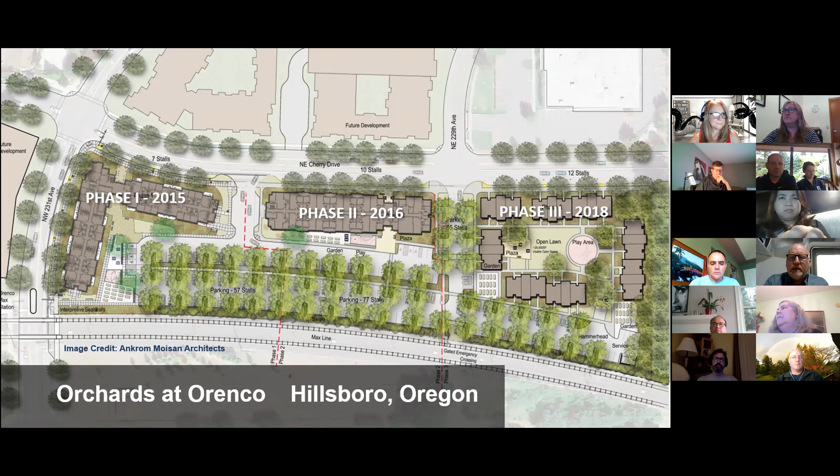So we worked with them to program this project, and Ankrom Moisan was a great design partner on the project with the team. William Wilson Architects was involved early in the project as well. It was a fantastic team working towards Reach's goals.

One of their goals was certainly to deliver the affordable housing, but even more important, in their view, they wanted to do a large-scale project. It was written into their 5-year plan in 2010, and by 2015, they wanted to deliver a passive house certified project of large scale in the affordable housing community.

Dee Walsh, who was the executive director, had toured in Europe and had been fascinated by what she had seen there with several other nonprofit developers from the US, and came back lit up by that vision. And they put it in a plan at Reach.

We started in 2012, and by summer 2015, we had delivered the first project for operation. That was 57 units of affordable workforce housing. The building was about 58,000 square feet.

We achieved PHIUS Plus certification, in this case under the German PHI passive house standard, and the measured EUI of the building, for those who are kind of geeky on EUI, is 21, which actually is a couple points below what the predicted EUI was. So great results at that building.

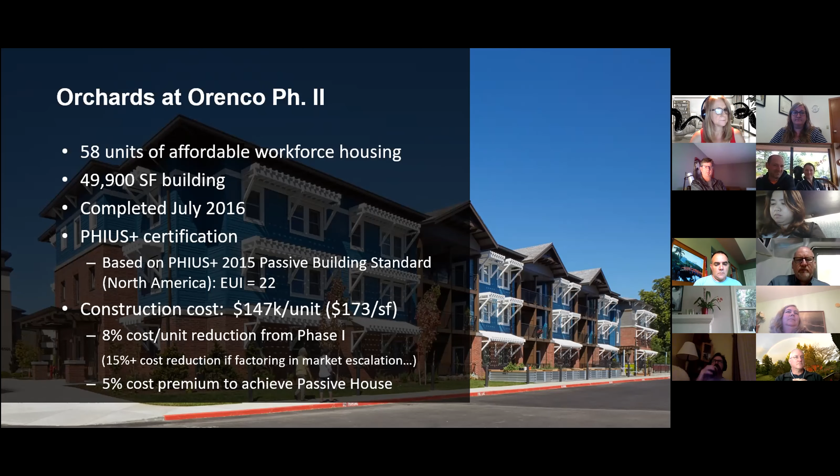But overall, between the two phases, it was an 8% cost reduction, and when you factor in the escalation in the market that was happening there, it was actually over a 15% cost reduction to deliver phase 2 from phase 1. And notably, we reduced the premium to achieve passive house to just 5%, which had a lot to do with optimization of our design and the things we learned on phase 1 that we were able to fine tune for phase 2.

Phase 3 is a little bit different in that the first 2 phases were workforce housing, and the 3rd phase was family housing. Each phase, again, all of them were designed by Ankrom Moisan. They all had a little bit different look and expression and form, but there's many elements that tie the projects together as well. This project is a little smaller in unit count, 52, but they're larger units—quite a few 2 bedrooms, a few 3 bedrooms, and only a few 1s.

And a 62,000 square foot building. Again, a little bit larger building because of the larger units.

We finished this, and actually there was a year gap between phase 2 and when we started phase 3. That had to do with the funding cycles at the state, the tax credit allocations, and phase 3 wasn't successful in its first application, so it sat in the drawer for a year. And while it was sitting in the drawer, all of our goals and Reach's goals were still intact, which included pursuing passive house on phase 3.

We certainly studied it with the design team extensively, but when the project did start moving forward, it was decided not to pursue it. The measures were going to cost too much in the market at that time to be able to finance the project.

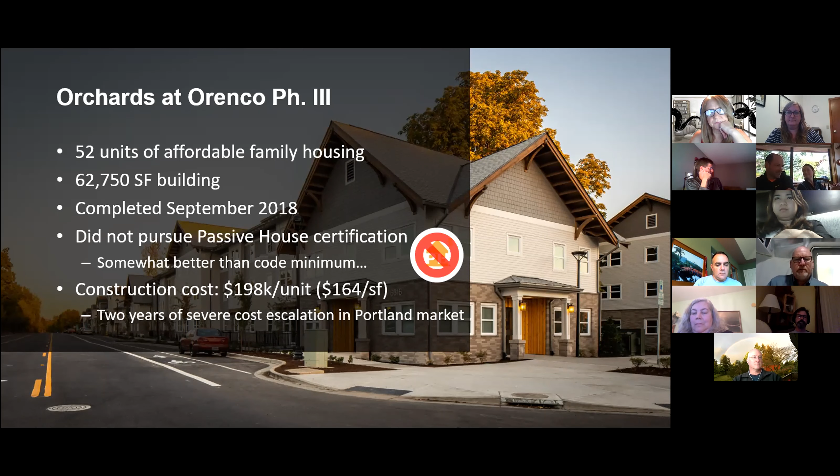But notably, the project suffered a lot of cost escalation in those two years between when we started phase 2 and phase 3. So it was sad times for us because we'd accomplished a lot with the first two phases of the project, and we weren't able to achieve that sort of gold standard result on phase 3.

And again, we're all passionate about this - the folks at Reach, folks at Ankrom, folks at Walsh, our team. We wanted to do it, and it really pained me that we didn't get it done on phase 3. So that's just kind of a parable, I think, about what we face in the industry right now when we're thinking about providing more housing that's needed.

We've got an affordable housing crisis. I like to say we need more housing, and it needs to be better housing. It needs to be really well built, well designed. It needs to be durable, and it needs to be super efficient, energy efficient, to deal with these environmental impacts that we're experiencing and that we need to mitigate much better than we are currently.

But while we're facing those challenges and trying to meet those goals, we face this challenge, which is construction cost escalation. This is a chart put together by a fellow named Ed Zarenski. Basically he's tracking construction costs over the last 15 years, and you see a big steady rise in costs. This is tracking the cost indices put together by different reporting systems in the industry, some companies, and then such places as RSMeans.

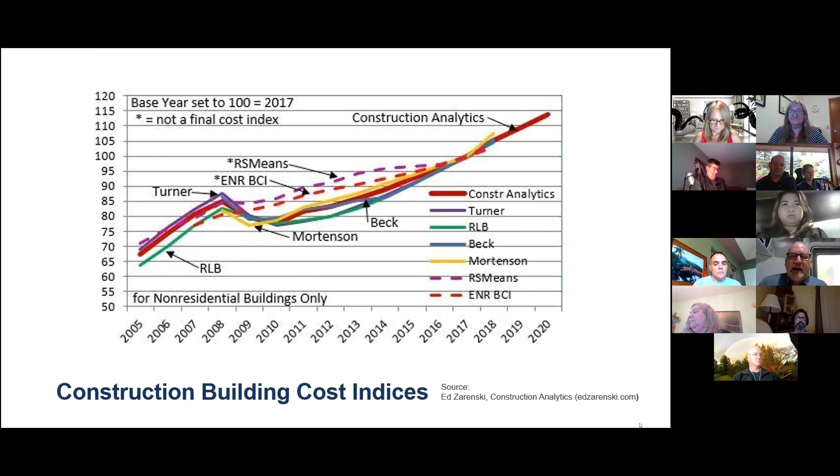Normally the inflation rate or escalation rate for construction is in the 3 to 4% range, and what this chart is showing is that it's more in the 6 to 7% range during that period from 2014 to the present, really. But it was significantly higher than that in our region and in the multifamily market.

So a huge challenge for us while we're trying to achieve these goals. We've gotten our heads around this issue of construction costs, and there's a lot of costs that go into putting affordable housing together.

Why so much focus on construction costs? Well, this chart shows why, because it's by far the biggest piece of the pie. It's where we can move the meter the most if we can figure out ways to reduce cost.

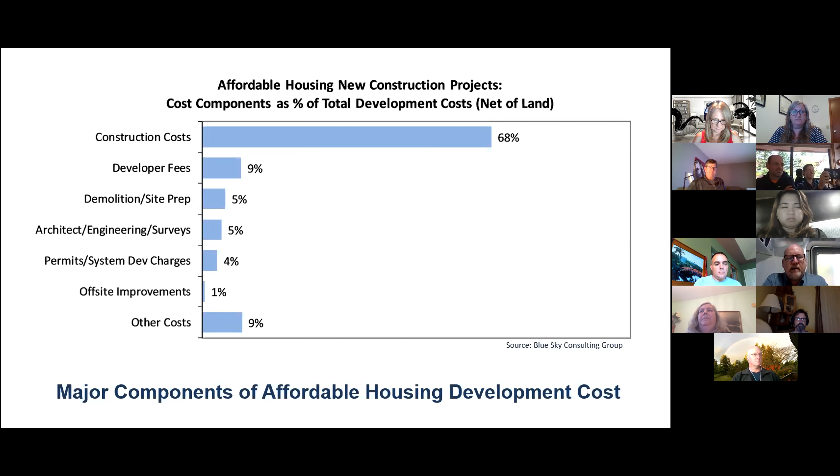So that's what we're focused on for this talk, but there's a whole slew of other issues that relate to the cost of affordable housing that are in those other line items down below, and they need to be addressed in some ways as well.

When we think of what is construction cost, it's essentially the divisions of the work all added up. So that's some big ones like in affordable housing, the wood structure tends to be a very large piece. Finishes are a large piece, the mechanical, electrical.

We have a general category at the start there for site supervision and such. We have what we call the other category that might cover the safety plans for the project, the hoisting and access for the work, miscellaneous other items.

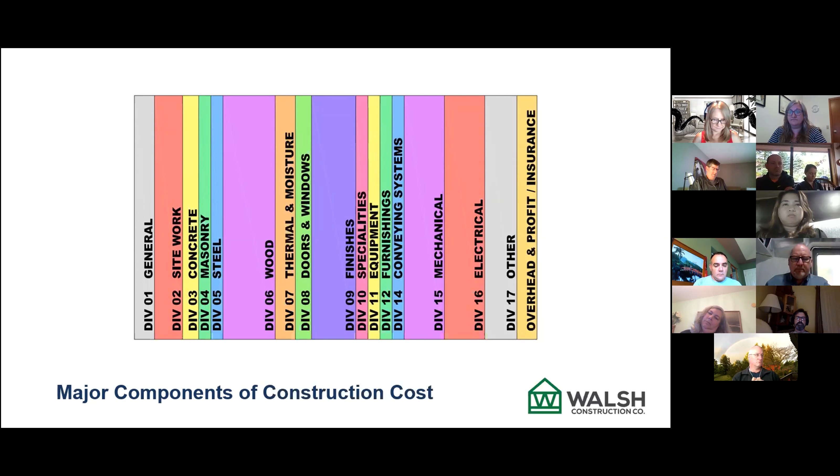And then at the end, a little bit of something for the trouble of the general contractor, overhead and profit, and insurance, a small amount typically. And when we add all of that up, that is what is essentially construction cost, or what we also refer to as the hard cost of the project.

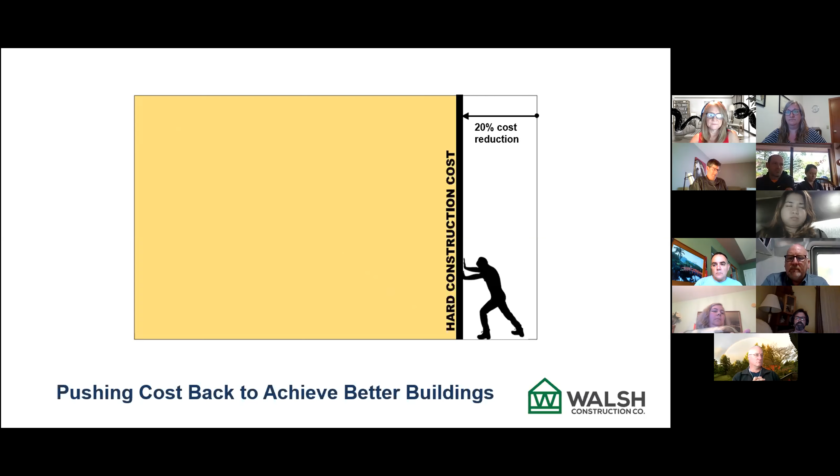So we step back and say, what if, to address this housing affordability issue, to address the numbers issue, how are we going to deliver more housing, especially with a limited amount of resources to do it? How could we work as teams in the industry to push costs back, given this wave of cost we've been facing for the last almost 10 years now?

And we conceived this idea of just conceptually, what could we do as teams to push costs back 20%? I know we would have to do a lot to do that, but let's start thinking about that and talking about that, how we can do that as teams.

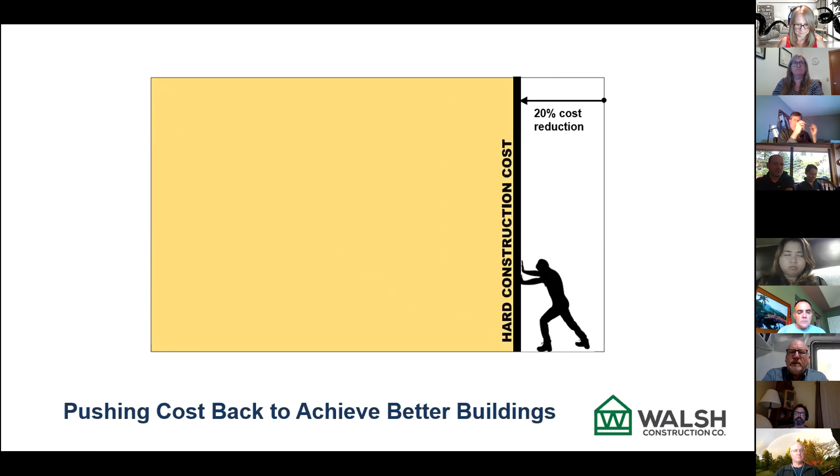And if we could do that, what could we do with those savings that we could make.

And in the niche that we work in affordable housing, where a lot of Walsh's work is, we work with mission-driven clients and owners, they're not about building and flipping properties. They build and hold for the long term.

They have other missions to what they do with their buildings, take care of people, support the community. And part of that is a better living environment and a more efficient environment that costs less to operate, not just for themselves, but for the people who live in the homes that they create.

So our clients are very interested in performance and always have been for the last 20, 25 years that the green building movement has moved forward. They've been very proactive and emphatic about embracing that. So we know that's important to our clients.

We also know that - maybe you don't unmute, but raise your hand if there's any architects in the room. I believe there probably are some. I'm an architect. Yay! I'm an architect as well.

So what I want to stress is that we want to account for differentiation and amenities and such, and I just use the term joy for that. You can lump beauty in there, whatever you would like, but we're not talking about creating barracks and minimum existence dwellings and really crummy buildings.

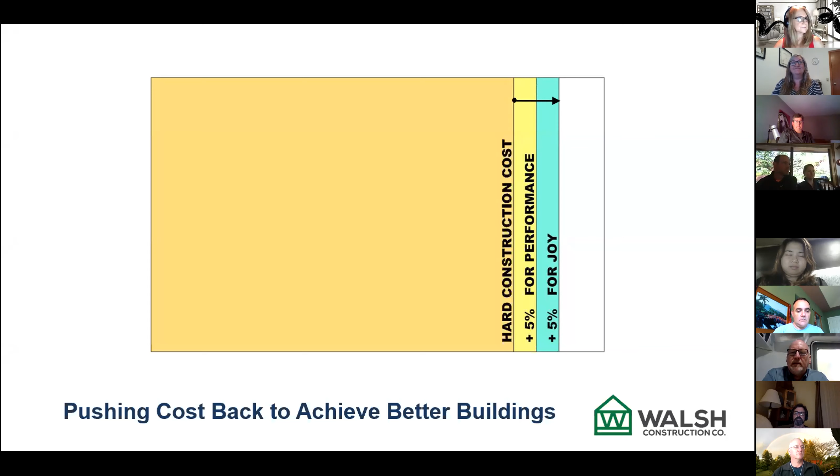We're talking about really great buildings, what I call better buildings. And so the idea there is if we can find ways to work diligently to reduce cost that much, then we can create room to have these performance features and amenities in our buildings and still reduce cost.

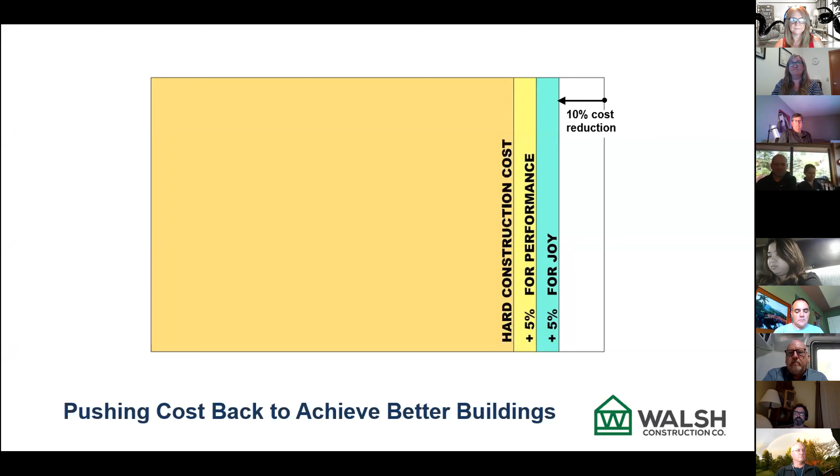And our idea is shoot for 10% cost reduction, but really better buildings coming out of that from what we're seeing today.

And I'm sure many of you are there where we have been, where we've just seen a lot of projects get reduced in quality, just desperately hacked at during value engineering processes late in the game because of runaway cost escalation. And we're trying to create a more emphatic way to address that and turn that on its head and be able to build quality back into the projects through our process.

So how might we do that? We look at it a couple different ways. One is...

By applying a set of principles of cost-efficient design to the overall design of the buildings, and in many cases to the subsystems that go into the building, focusing on using more standardization, more repetition, more prefabrication to the extent it's valuable in projects, and also looking to use the economy of scale whenever possible.

So that is really typically site dependent, but again, it comes into play when you can find larger sites as a developer and as design and construction teams. You've got more potential to reduce costs and be more cost efficient.

I'll talk about those in more detail in a minute. The other thing is just the idea of opening up the lean construction toolkit and not doing everything in there, not taking all of the tools out and using them all at once, but selectively using some of those tools to make a better process.

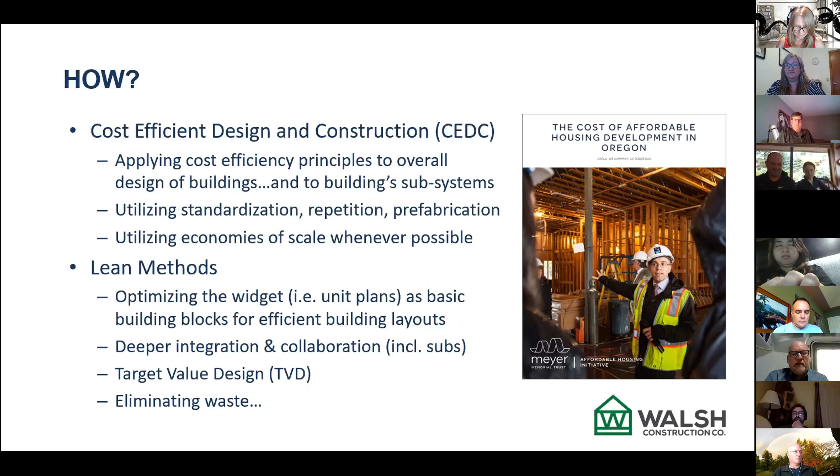And then just the last idea is eliminating waste wherever you find it in the project stream, during design, during construction, always looking for ways to reduce and possibly eliminate waste.

So with cost-efficient design and construction, basically Walsh has been building affordable housing in the Pacific Northwest for over 50 years. And we basically said this cost issue is so critical now to the clients, we're just going to lay out all of our ideas as clearly as we can, as simply as we can. And we kind of created a white paper with these ideas.

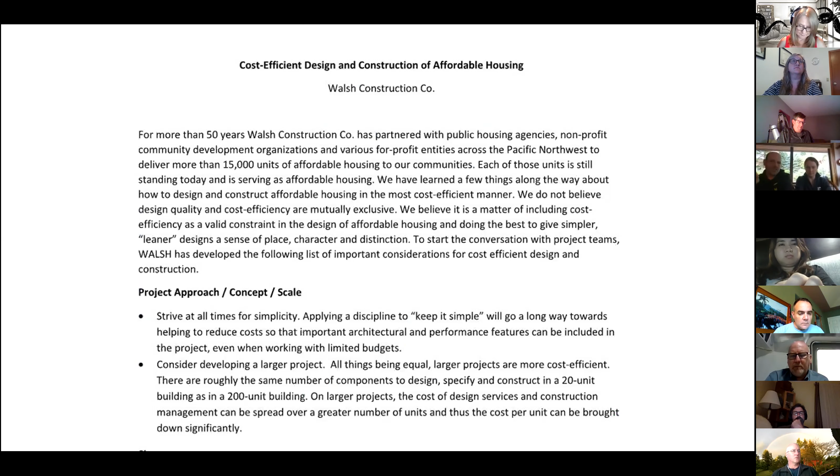And anybody listening who's interested in that, I can provide it to you if you reach out to me at the end of the talk or after the talk. The last slide in the talk has my email address, and we welcome people reaching out for this information.

I'm not going to get into the specifics of the principles here because we're time limited, but I essentially call it—I grew up in the Midwest—I call it farmer's common sense. It's all pretty straightforward stuff. It's stuff that you basically know.

Almost I feel like I need to apologize for writing it down for the industry and for certain members of the development, design, and construction community, because many of these principles aren't followed on many affordable housing projects and their designs. So none of this will actually be earth-shaking to any of you, but it was the exercise of putting it together that was more about just taking stock of it all and making it as clear as possible as we could.

These first three items are really issues of project conception, and they're less in the design sphere and the construction sphere than they are in the developer sphere, in terms of site selection and just how they assemble teams and conceive of their project and lead their projects.

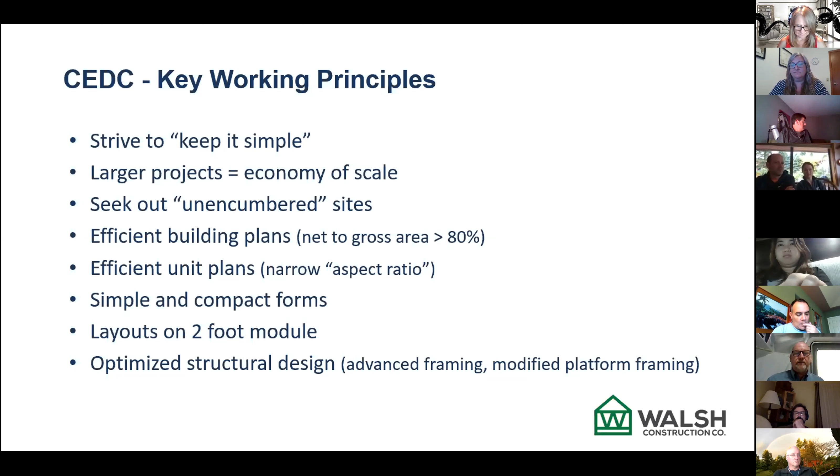You can get apartments too narrow, and then they're not functional or livable anymore. A classic example is what's called in Seattle the urban one bedroom—we don't see them as much in Portland, but they're everywhere in Seattle. That's basically a one bedroom with the bedroom internal, either at the corridor wall or mid-position within the apartment, borrowing a little light from the living area, kitchen and dining area. But it's not really good design practice in terms of aspect and livability, having daylight and ventilation into a bedroom. In fact, in the affordable industry, that's not allowed—Oregon Housing and Community Services won't fund a project that doesn't have a window in the bedroom.

Continuing on, another set of principles in the CEDC canon—again, the white paper outlines them in detail. Some of these you can live with if you're architects out there; some might be a little harder, bitter pills to swallow. But these are frankly what was done 20, 30 years ago, and prior to that in historical traditional construction, and in the cost-effective, affordable construction of the 60s, 70s, and 80s, that we largely moved away from in the last 20 years or so.

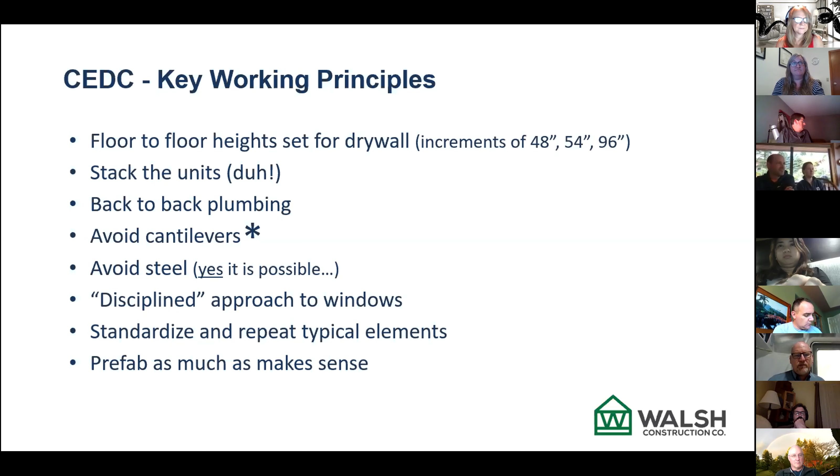But we also recognize—we're not proposing that developers and architects working with them are going to design cookie-cutter buildings, the same building for different sites all over the place. We understand every site is unique. The program that goes with every site is typically quite unique, and that in itself will require customization, along with any number of things that have to do with the site, its configuration, how the corner bound lines come together, what the zoning envelope and overlay are, and what the neighboring buildings look like. All of those are factors we all know about.

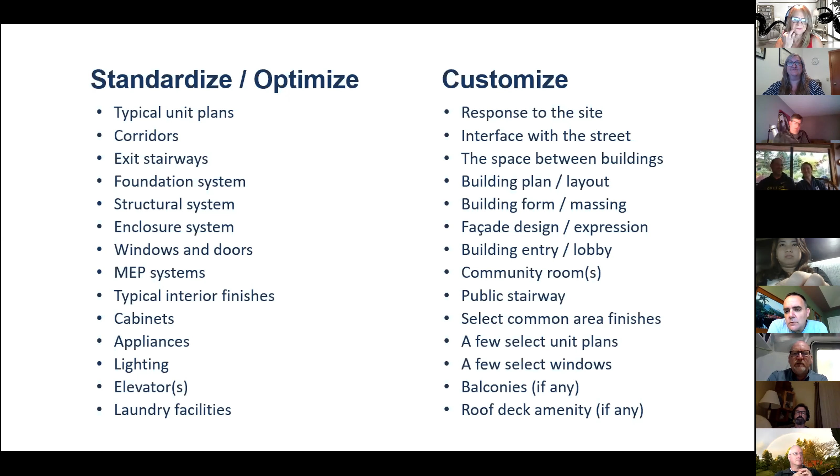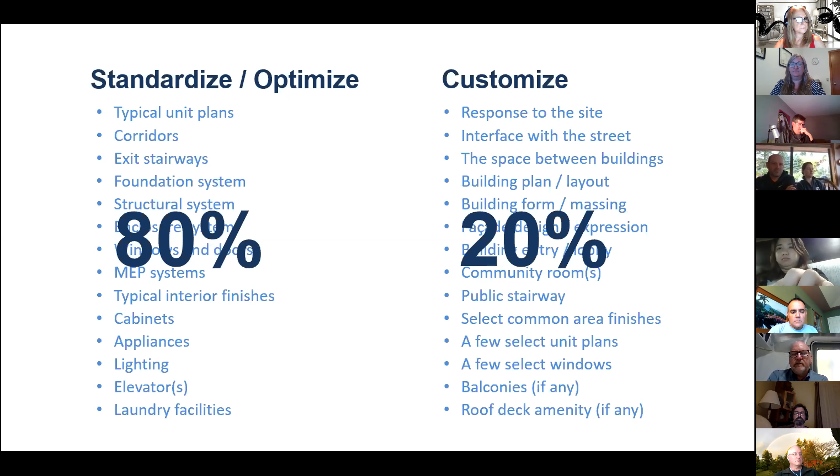So our idea is to really focus on the things we can standardize—roughly 80% of the building, or could be even more. If we focus on that, we're going to drive costs down in all of those standardized, repetitive elements, and that in turn, if followed with a lot of discipline, will create a lot of room in a given budget to really focus design attention and materiality on the items on the right that can actually make the place unique and special.

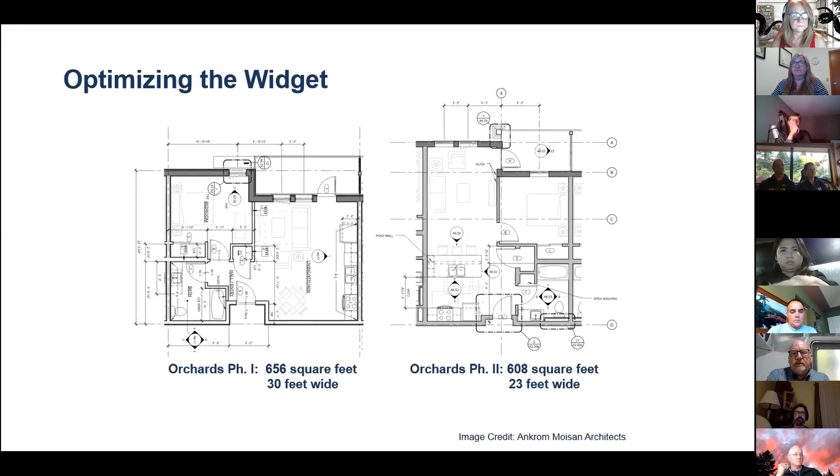What happens with that change? Well, a couple things. That simple singular change changes some quantities significantly. The amount of skin you have to build per unit is reduced 20% by changing that width of that unit.

If we aggregate the savings across the projects, this is a diagram of the phase 1 plan with those mostly 1-bedroom unit plans. Same thing happened at the 2-bedroom units. You can see how wide those 2-bedroom units are.

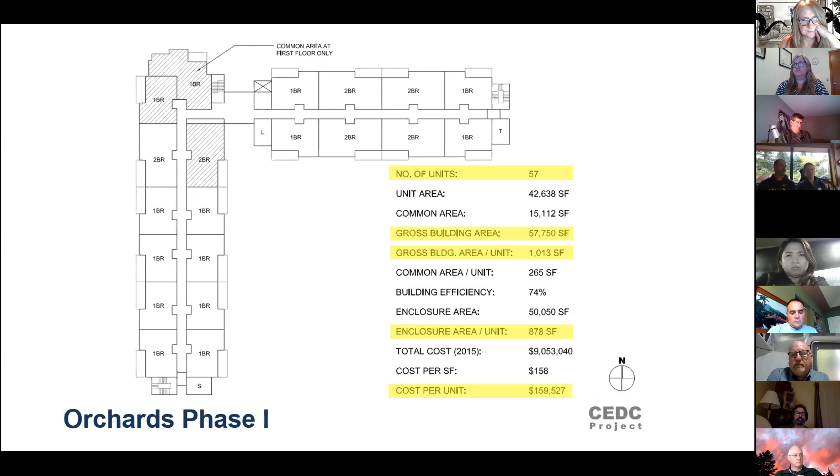We had 57 units in phase 1, and I mentioned before, 58,000 square feet. That's a little over 1,000 square feet per unit, almost 900 square feet per unit for skin, and it was $160,000 a unit.

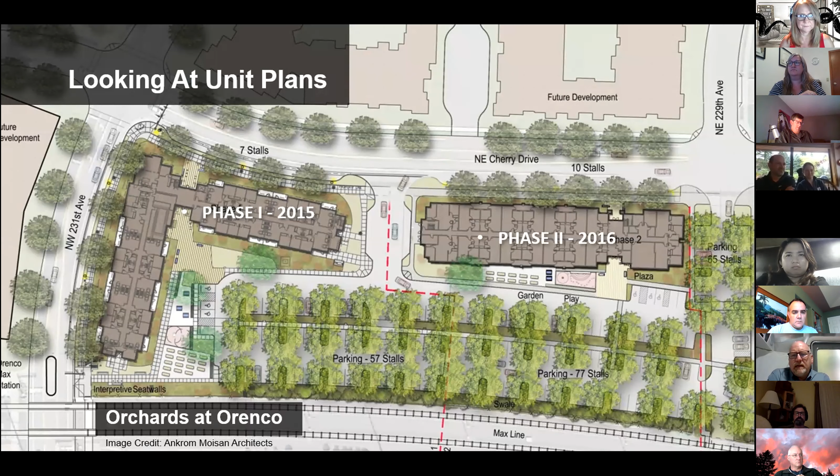Now the diagram for phase 2 - interestingly enough, let's go back here a little bit. Those buildings are both 3 stories tall, and they both have the very same number of units. Actually, phase 2 has 1 additional unit, and again the unit mix is essentially the same. So you see a building form on phase 2 that's much more efficient.

Here's where it shows up in the numbers. We have 58 units. The amount of building area on a per unit basis is reduced from over 1,000 to 860. The skin is from nearly 900 square feet per unit down to less than 700. And the cost per unit went down to 147,000.

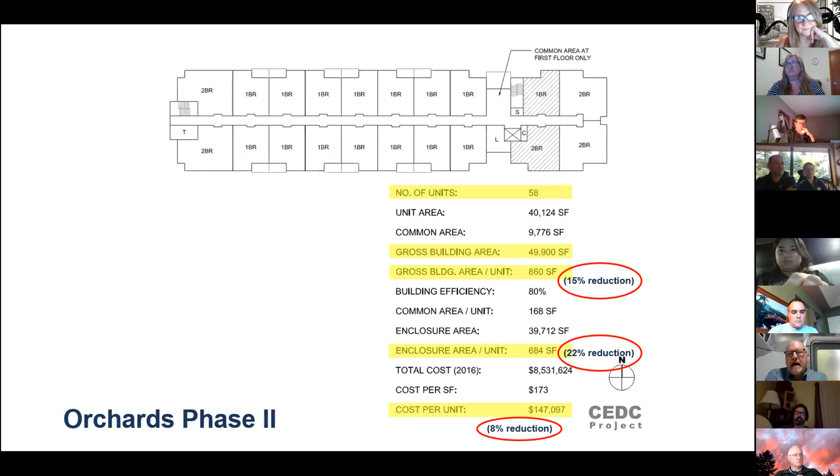That was the 8% reduction, and if you figure the escalation, it was more than a 15% reduction between the two. A lot of it was just the raw efficiency of the building layout, starting with the unit plan.

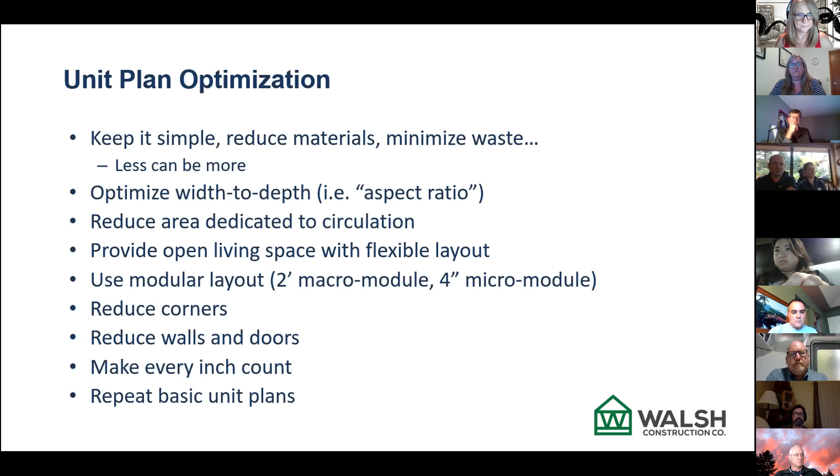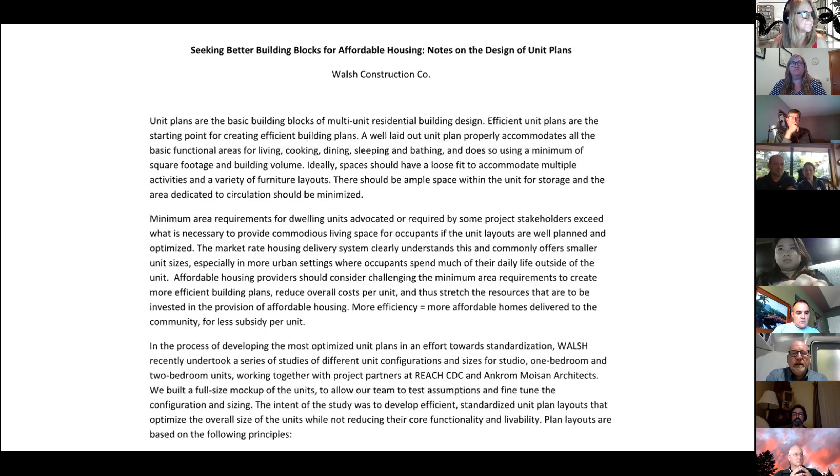I don't have time to go into the details of unit plan optimization, but we've thought a lot about this as well - what we've seen, what we think works, things that are problematic - and we've laid down a set of principles for thinking about unit layout and planning, and put that into a white paper as well. Again, if people are interested, we can share that with you after the talk if you reach out to us.

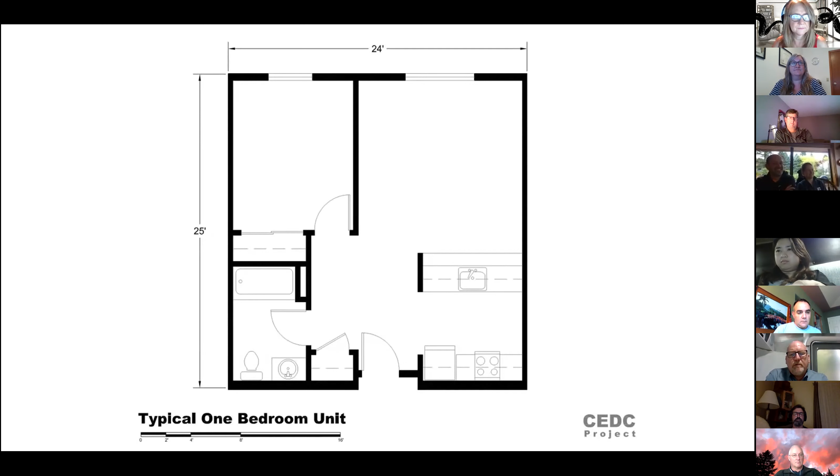Over 50 years, a lot of 1-bedrooms look like that, 600 square feet. When we're talking about optimizing, we're talking about this notion of simplifying but not impacting livability, and by just being smarter about things. I'll get into those in just a minute.

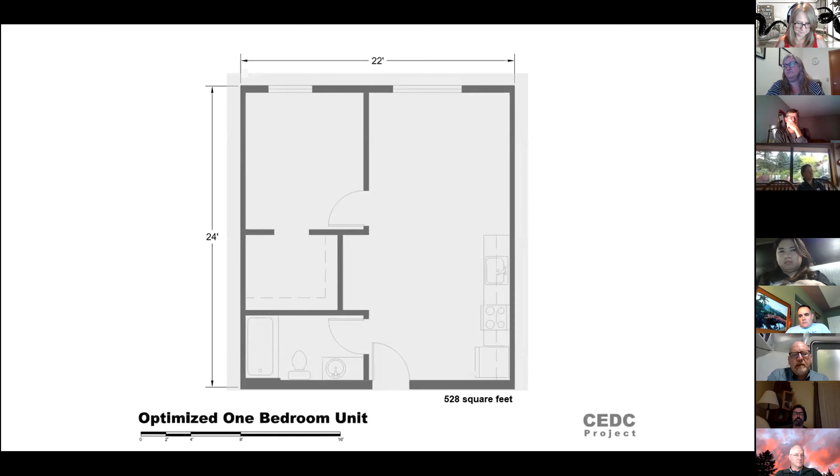What we've done here is we've reduced the size of the 1-bedroom from 600 square feet to 528 square feet. It's not a huge reduction, but it's a selective reduction that we believe still keeps the livability and functionality of the unit intact, and does a whole bunch of other things.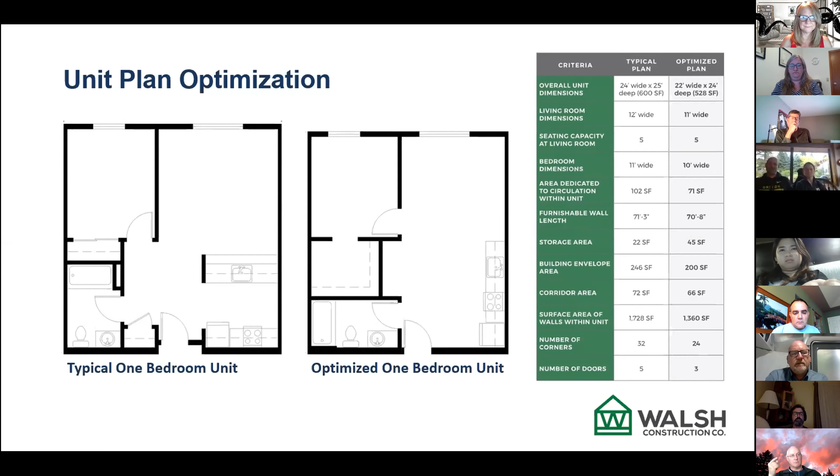There's a whole thought process that goes into what we're thinking about with units, and even some suggested unit plans that we've developed that people could look at if they're interested.

So we have a client. I've talked to a lot of our different clients in the nonprofit world about these ideas, and I had a client who called one day driving probably fast down the highway. He's based in California in the Bay Area. They do a lot of work in the Northwest, and he's like, we got some land, Mike. We got some land, we want to do some homes, and we want to do that thing you're talking about, that radical simplicity thing.

So I'm going to talk about case studies. I don't know, how are we doing on time? We okay on time? We're okay on time.

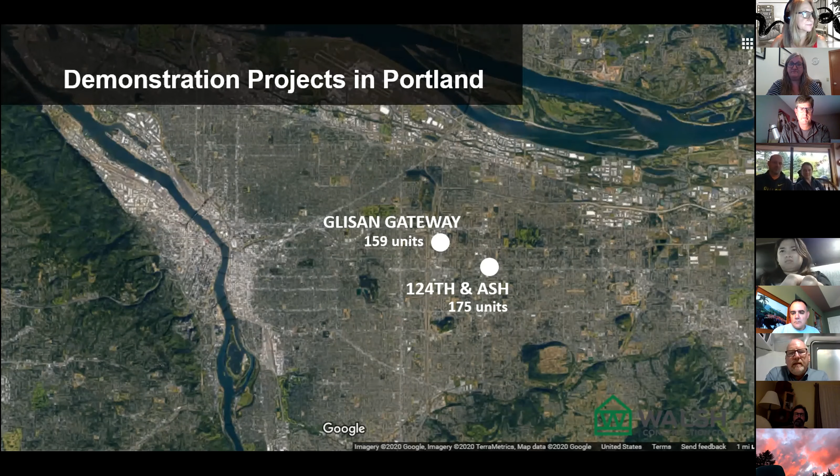We're actually working on quite a few projects applying these ideas now. The two most developed are well into construction and will be done later this year, both on the east side of Portland. One is 124th and Ash, which is 175 units of workforce housing with Reach Community Development, and Glisan Gateway is 159 units, again workforce housing, really close to the Gateway town center and transit center. They're right off of 405.

These projects — I showed this image a little earlier, didn't speak to it when I showed it — but when we were developing these ideas, something was going on in the background, which was the Meyer Memorial Trust, a charitable organization based here in Portland, serving Oregon. They have multiple focuses for their charitable giving, but one of them is affordable housing. They've been interested for many years in the issue of the cost of affordable housing, and why it seems to be escalating so much, and why it seems to be so much more than the cost of housing delivered in the market, in the non-affordable market. They convened a work group starting in, I think, 2015 or 16, to study that issue and advise them on it, because they put a lot of money into this, and they want a good return on the money they're putting into it.

So they had good questions about why does it take so much to do this. Of course, those involved in the industry know there are a lot of rules, regulations, and inefficiencies in the system, and those were all laid out in, let's just call it nauseating detail, during the course of the work group that Meyer put together. They put a report together — you see it here on the right. If you're interested, you can search that online, it's very interesting — one of the best pieces done in the nation to study the cost of affordable housing.

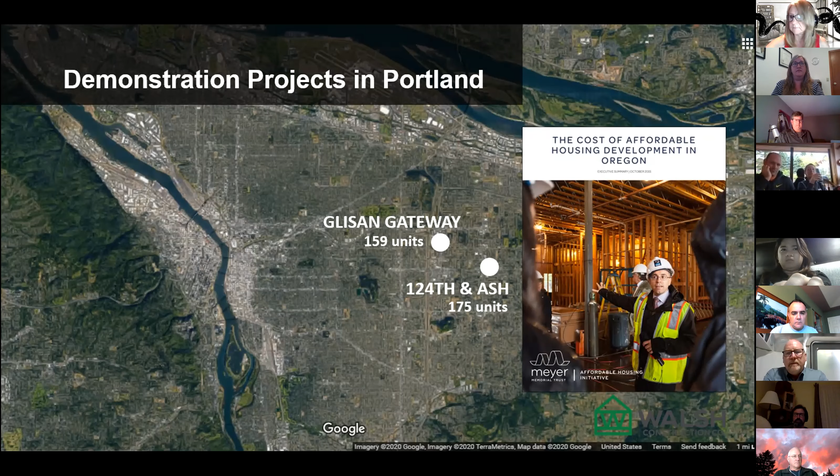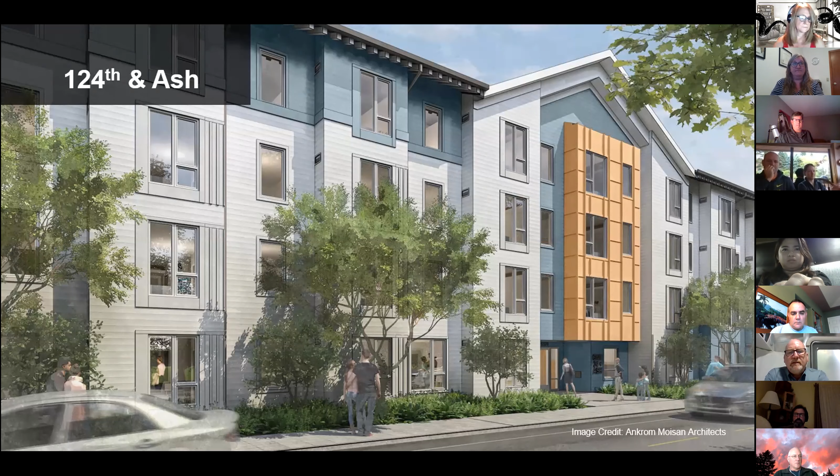124th and Ash was the first project out of the gate pursuing these ideas in depth. This is in East Portland. Reach is the developer, Ankrom Moisan is the architect, and frankly this is the same team that did the Orchards project, with Walsh working on construction.

A number of years ago we accomplished passive houses over three phases in Orenco, and it was basically the same team getting together to pursue Reach's new goal, which was cost efficiency, and pursuing that innovation in production of cost-efficient housing.

This project was awarded a Meyer Memorial Trust grant to help fund that, and it funded a couple things. It funded a little bit more work in the pre-construction process relative to pursuing our target value design process, and we built a mock-up of our optimized widgets, or optimized unit plans - full-size mock-ups of those.

It also went into the procurement of a lean construction coach that Reach brought on board to experiment with lean construction ideas on the project.

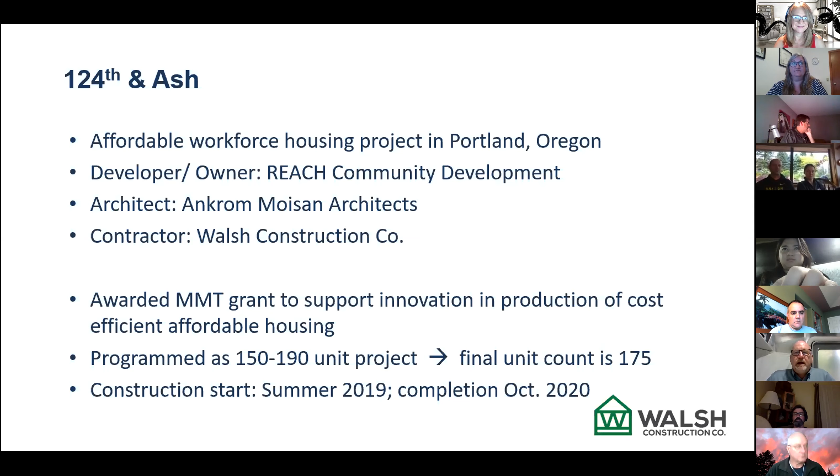We started construction last summer, and should be complete in October. Two months ago we thought we were going to be a month or two ahead of our scheduled delivery because things were going very well. But of course we've been hit by a little surprise along the way, like everybody else has. So we'll see - we still think we're tracking well for on-time delivery for the project.

As I mentioned, Reach wanted to pursue lean ideas here on this project. The first and foremost notion was that they were going to be very clear about what their goals are, and one of them was cost reduction - they put a number on that. They envisioned a big, hairy goal for the project of reducing costs 30% in relation to the total development cost limits that Oregon Housing and Community Services sets.

They basically set cost limits for affordable projects pursuing tax credit allocations, based on a per unit limit cost for a 1-bedroom unit and a 2-bedroom. So you add up the number of units of those various sizes, take that times the cost limit, and that tells you what your total development cost is for the project. They set the goal to be 30% below that.

It's no secret that some projects exceed that and are allowed under a variance rule to exceed that cost for hardship reasons, and it's not unusual for that to happen. So certainly, I don't think anybody's achieved a 30% reduction from those targets before.

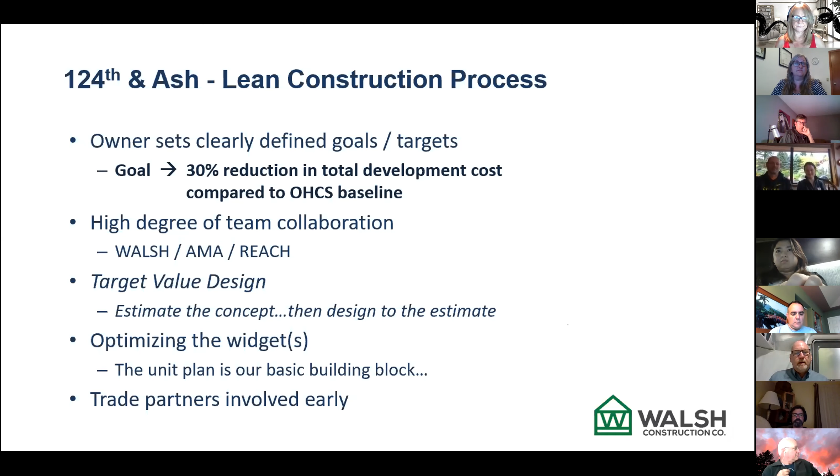Optimizing the widget again, I mentioned we actually built, this was the project where we really explored the optimized unit plans, and we built full-size mock-ups of those in tenant space that Reach had in their headquarters building down in South Waterfront, and we were able to kick the tires of what we were doing with those units. Frankly, Reach even brought their funders in and the stakeholders, the city agency people that fund the projects, the state agency people, so they could see what we were doing as a team. It was a really great way to show people that, yes, we are trying to refine and optimize, but we're also very attentive to making livable, workable homes while we're doing that.

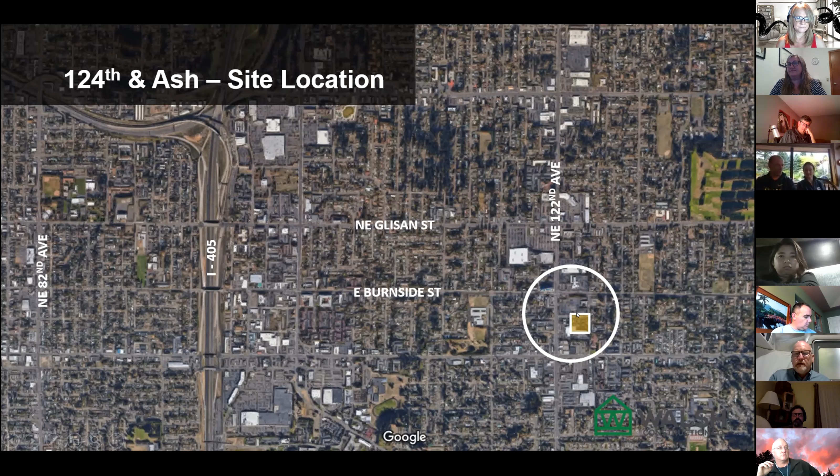I mentioned getting the subs involved early. So this is the site. This is East Portland, out just east of 405, 122nd Avenue and Burnside is a Max stop right there, where the Blackburn building is, as some of you may be familiar with. We just finished that building for Central City Concern as well. And right as we were finishing that, we moved over here to this site and began the ASH project.

And this is what I'll call the very definition of an unencumbered site. We did have our utilities in the street there on Ash Street. We had very little slope on this site. It's roughly 240 feet by 240 feet square, so essentially slightly larger than a Portland downtown city block. There you see a bunch of glorious asphalt paving and some small trees. So this was basically a surplus park and ride for TriMet, right across the street from a really huge park and ride. They had this, I guess you could call it a fallow park and ride that really wasn't even used. It had a chain link fence around it. Reach was successful in securing this through a competitive process with TriMet, and we began work on the project.

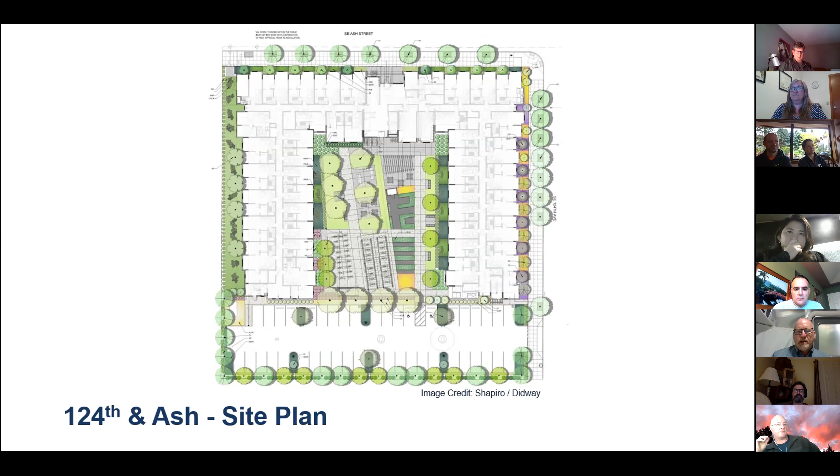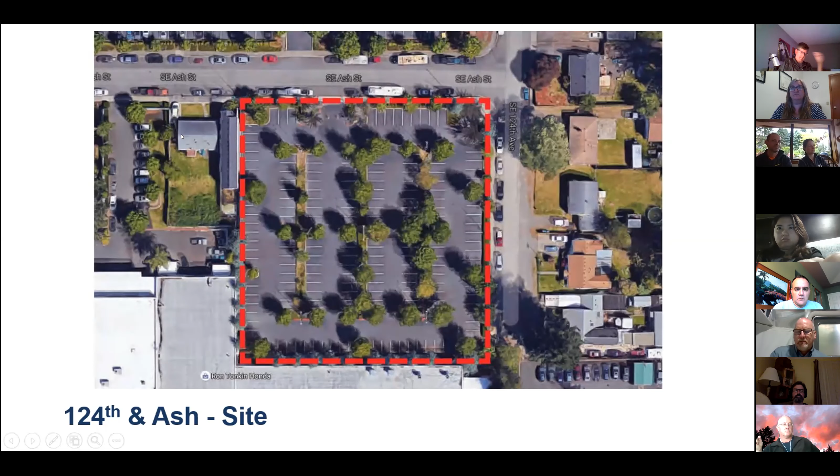There's a large warehouse here for Ron Tonkin car dealership. Most of the, like I said, there was parking here, and then some single-family residential over to the east, and two small single families here on the west. So it made sense to put the surface parking here as a buffer between the courtyard and the building and the warehouse here.

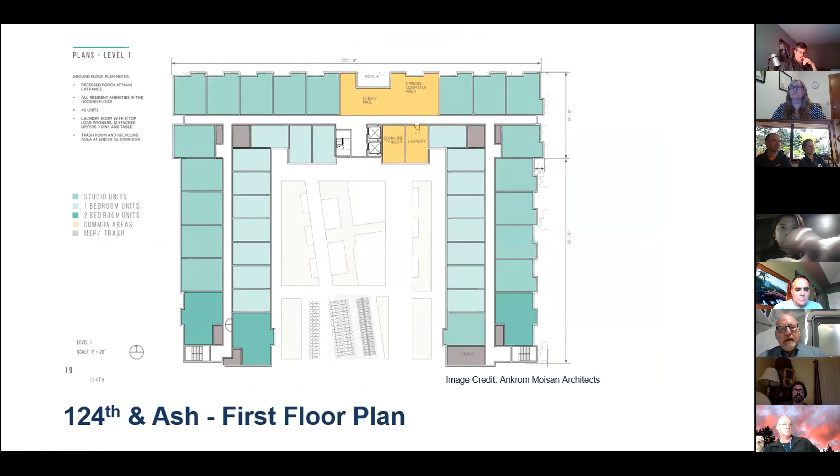Diagrammatically, you can see how the plan works. This is the first floor level. If we look at a typical floor up above, we have the optimized studio units lining the courtyard, wrapping the outside of the U and facing onto the street facades here. On the north and the east are the 1-bedroom units, and then the few, small in number, 2-bedroom units are located at the ends of the corridors.

One thing you notice here is this articulation of the street facades. In general, we tried to pursue a fairly simple massing of the building and form articulation, but here the project wasn't governed by a type 3 review. It was governed by design standards, community design standards out in the neighborhood there. One of those requirements is that no facade element can exceed 500 square feet in a single plane, or you have to have a 2-foot minimum articulation. So it's literally almost a mechanical implementation of the planning standard to apply to these facades facing the street. But again, it's just those same optimized units, just a different implementation of the outer edge of the unit. Everything else inside stays the same.

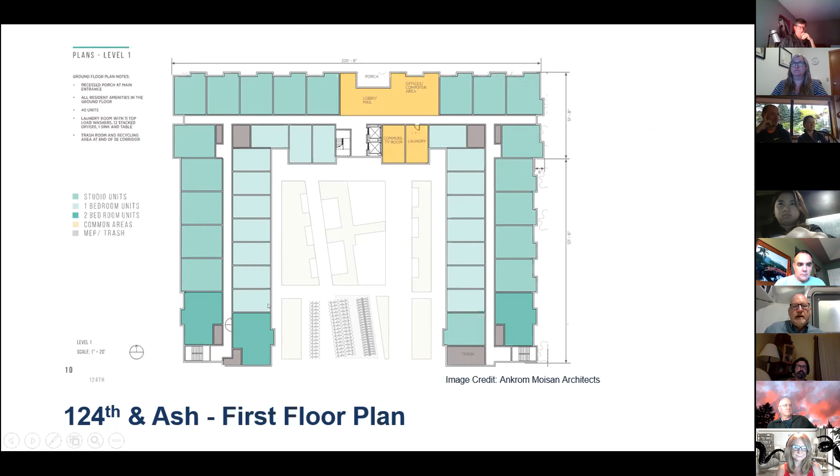At the ground floor, there's a little bit of a few stacks of units that are reserved for common areas, but it's a very efficient building layout for the most part. As you can see, very standardized and straightforward.

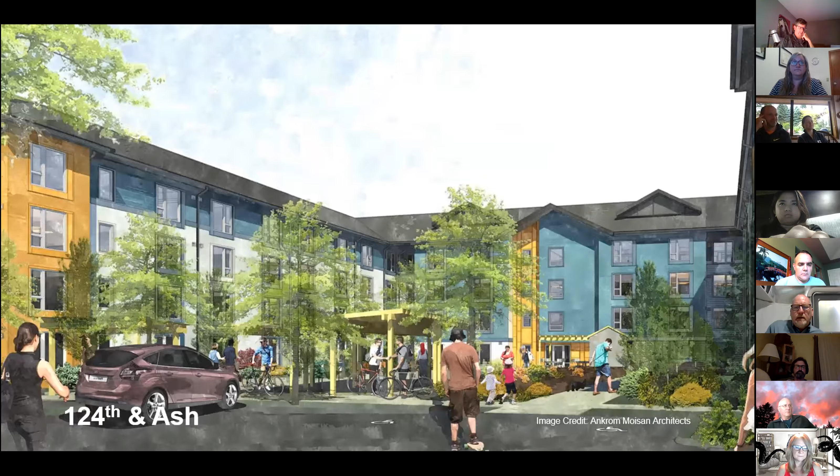Here's a view of the courtyard from the parking area, and a finished view where you see the step outs. These are the 2-foot bays that articulate that facade per the community design standards. The cladding on the project, in keeping with the, let's call it Spartan budget that Reach put forward here, is fiber cement. What we did as a team working together with Ankrom really worked through this idea called superlap, which occurs in about 5 or 6 different areas, little figurative elements around the building that are brought out and emphasized at entry points and touch areas.

And that's essentially fiber cement as well, but it was developed by Ankrom with what they called superlap. It's basically a panel that's detailed to look like a big lap, or a shingle. It looks like a shingle almost.

So it was one way of taking inexpensive materials and trying to do something different. You can also see here where they've done something similar with simple fiber cement materials, great patterning on the facade. So those were attempts to stick with the budget and still do that.

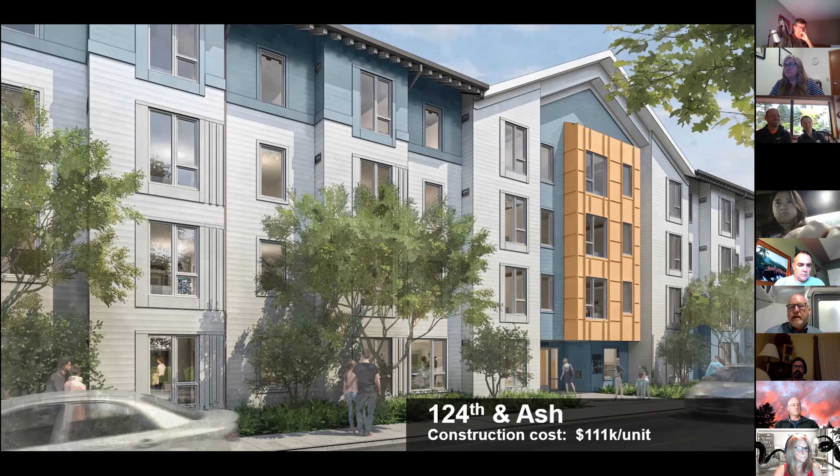What's really cool about the project is when we did all of that work as a team—this is many years after we did the Orchards project—we went out to bid and put that cost together, and we were at $111,000 a unit to do this project. So a pretty major reduction in construction cost on a per unit basis.

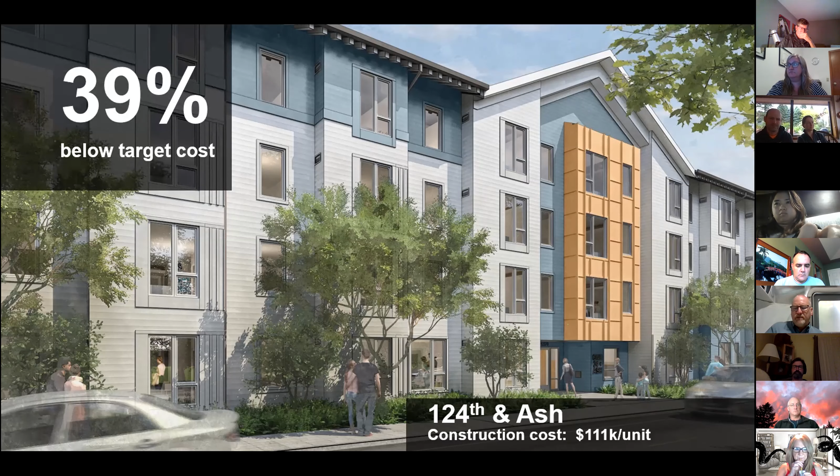Relative to Reach's target of 30% reduction, their total development cost for the project, once the big piece of the construction cost went into their final budgeting, was 39%. So it completely blew away their goal for the project. A great success of application of the ideas.

Now this is where things, I think, actually get really cool, because once you've reduced costs to that level, you can open up the menu, I like to say, and think about what you can do architecturally or with amenities to improve the project, make it higher quality, or more durable. There could be many more things added to this menu, but these are just some examples of things we might do.

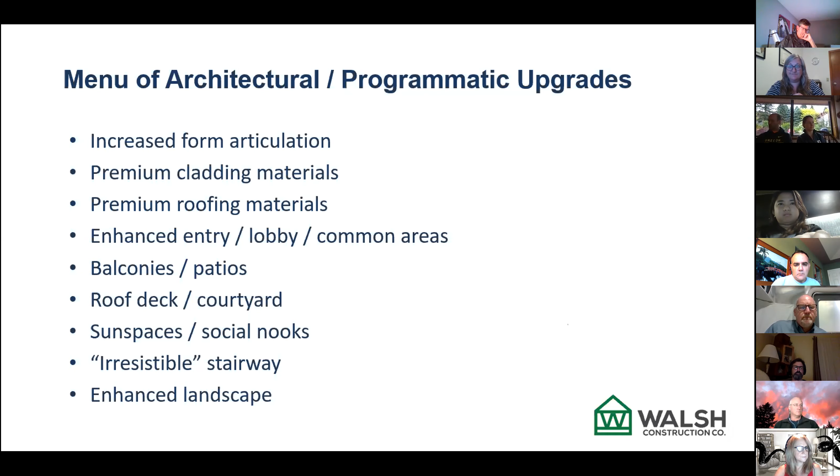In this case, we didn't have individual balconies on the project for the units. We have the big courtyard amenity, but you could look at that. You could certainly look at a more premium cladding. Reach did want to look at putting a standing seam metal roof on the project and ultimately decided not to do that, but we are putting a very large PV array on the roof. We've put in upgraded insulation materials and such.

That was the architectural menu. This is what I call the menu of performance upgrades you can look at. These are the typical items—it's not a super long list. These are the things you would do when you're looking at pushing your affordable housing to a much higher level of performance than code minimum, or what we even typically see.

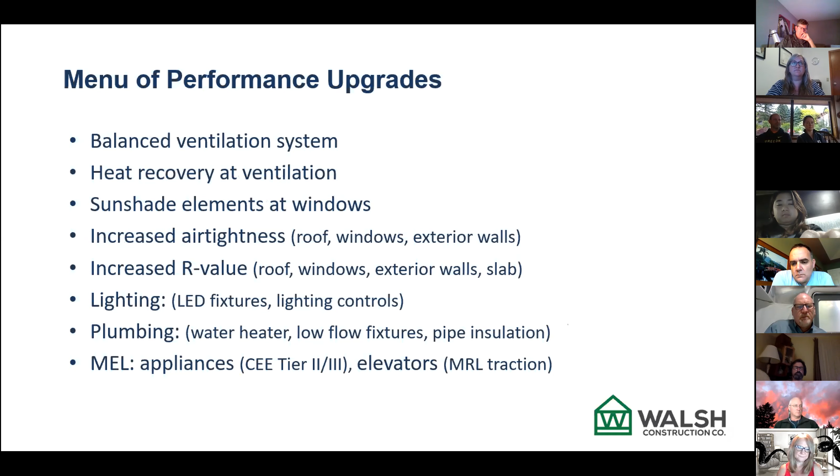As part of our thought process on the ASH project, we wanted to explore this a little bit more. So we said, what if Reach or another nonprofit client did want to pursue Passive House, or even the goal of a zero energy ready building? What would it take to get there from our baseline that we've developed and frankly are building?

If you think in those terms, our building as designed has an EUI of roughly 36. We'd think if you want to pursue Passive House or zero energy ready, you'd be looking at the Passive House level of 22 to 23 EUI. And if you want to really truly get down to the zero energy ready level, you'd be down in the 15 to 16 range. So that's kind of the target EUI range we wanted to think about.

We basically looked at that menu of performance upgrades and how we would implement that. One thing we did is we got a hold of a fellow we know, Skylar Swinford, who's now in Boise, used to be in Portland. He's a great certified passive house consultant and modeler.

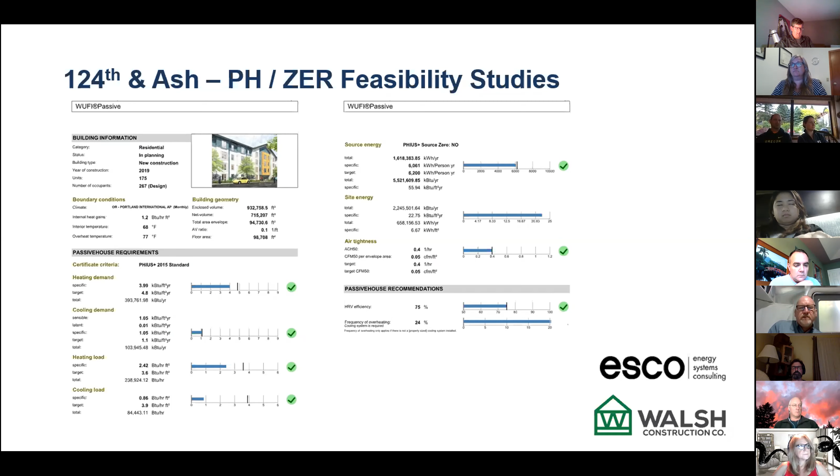We ran through a whole bunch of scenarios of how we would take the 124th and Ash design baseline and get it to the passive house and zero energy ready levels. We looked at a bunch of different paths, and he produced a number of reports on those paths. We found what we believe is the most cost-effective path to pursue passive house, which you see represented here by all of our criteria being met with the green checks.

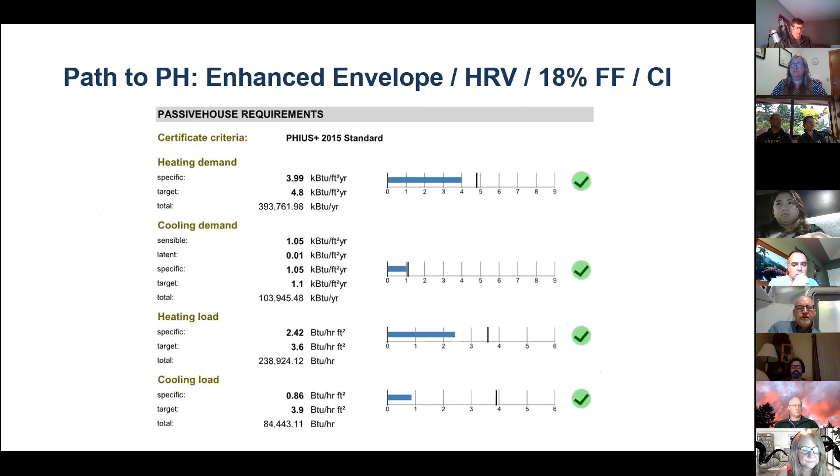Essentially what we were doing is looking at our menu of upgrades from a cost standpoint. The other filter to think about is that notion of a 5% premium or add-back into a project where you've reduced cost. If we apply that 5% for performance to the Ash project, we're at about $19.5 million on our GMP cost for the project, that's the construction cost.

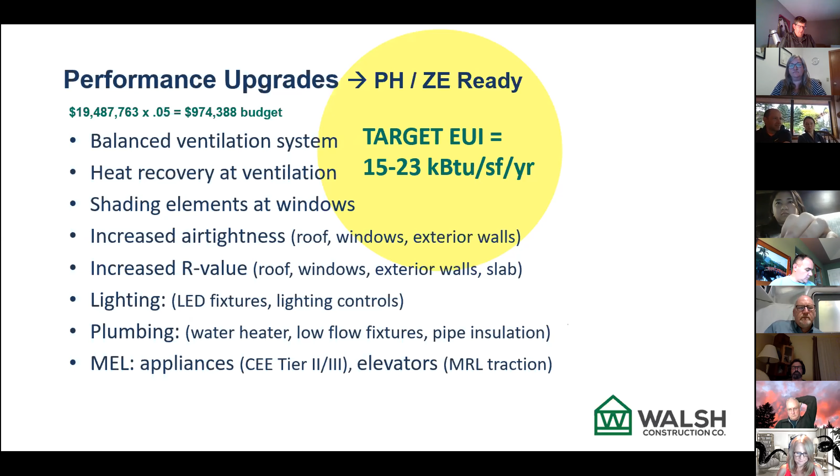If you take 5% of that, it's just under $1 million of a rough budget for these upgrades, if we were going to stay within that conception. Through the modeling with Skylar and cost estimating done by our chief estimator Ed Sloop, and Jay Neese, our senior project manager, we itemized all of those and how the cost would associate with the various measures taking us to the passive house level.

So what you see here is the cost associated with the different measures. The balanced ventilation system is actually no cost because REACH, as a standard for all their projects, has balanced ventilation. We do direct duct the fresh air to the apartments. They don't always do heat recovery, and in the case of the Ash Street project, we didn't have heat recovery, so that is an add.

A big part of that is the units themselves, but another part is how you run the ductwork. So you see $150,000 for ancillary costs, which is basically building a bunch of framework, air sealing and insulation, dog runs in the attic, the otherwise vented attic, to run the heat recovery return ducts. So it's quite complicated. I won't go through all those items.

But when we added it all up, we were just under $1 million of items to get to the passive house level of performance, the most cost-efficient, cost-effective path we identified with Skylar. That's just under 5%. On a per-unit basis, that's just $6,000 per unit to create passive house homes on this project, which is already incredibly cost-effective at its baseline.

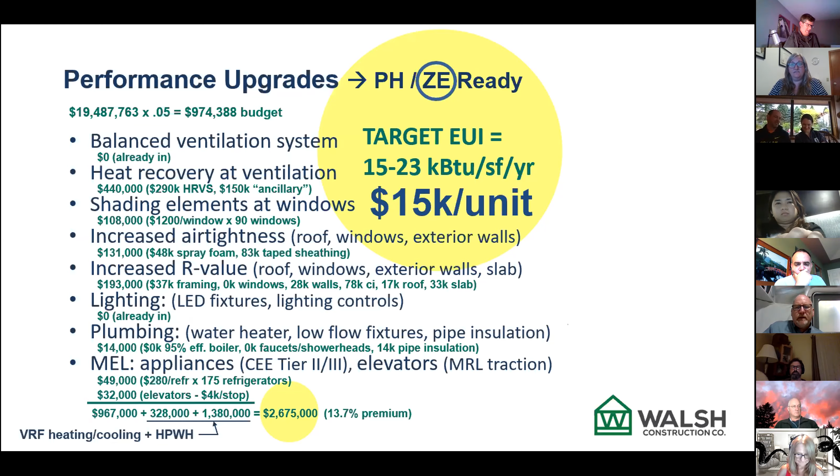So again, we're not at the point where we can say we can do zero energy ready for that 5% premium, but we can get a long way down the path towards that.

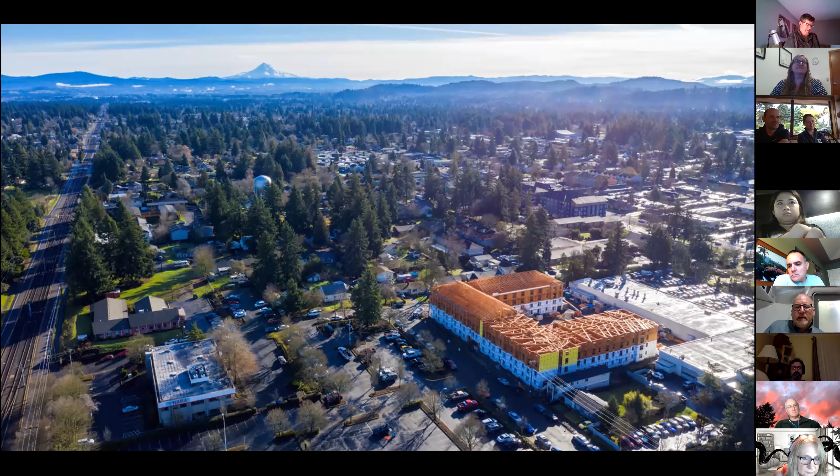This is a neat shot from a drone a couple of months ago while we were getting close to topping out the building on the east side, an aerial view that shows it.

We used all advanced framing in the project, and that was one of the ways to help bring costs down, working with a creative engineer, Scott Neiseth with Stonewood, a key member of the design team, to help us really optimize the structural system as part of the whole CEDC process.

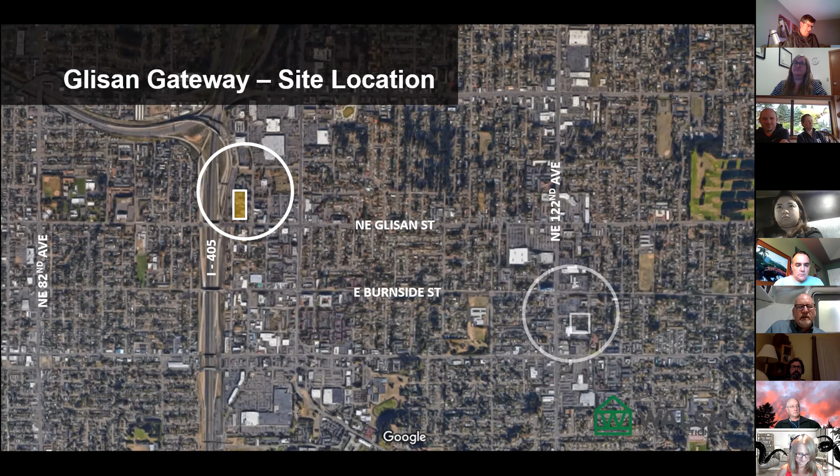So the Glisan Gateway is maybe 20 blocks away, again out on the east side. You see it's fairly close to where Ash Street is, the circle on the right. Again, a great transit-oriented development location, which was key for Northwest to pursue.

Here's a view of the image of the project through the design review process. Quite a different approach and result in terms of architectural character and quality. This project has mostly a flat roof, with a couple of steep slope roof elements, but mostly a flat roof or low slope roof.

This project had to go through full design review. It had to go in front of the commission. So we've got mostly brick cladding on this project as compared to the fiber cement that's on the Ash project. So the material qualities are a little higher here.

The approach to the roof—we see that low slope roofs as an essential design element are more costly than pitched roofs with asphalt shingle finish. So it was lacking some of the cost saving features of the Ash Street project. But as you'll see in a minute, we still achieved a really great cost result here while integrating all of those overlays of design quality that were essential to this project.

I mentioned before, this is with Northwest Housing Alternatives. MWA was the architecture firm that was leading design. And this project also received the Meyer Memorial Trust grant. We thank them for their support.

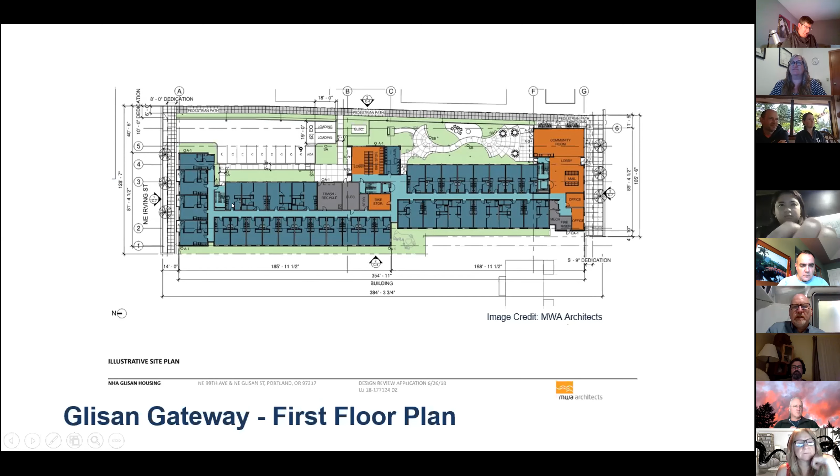So I mentioned the overlay of design review and certain aspects of the design that were more costly than we were able to do on Ash, but it still didn't blow up the model. Really, we got a great result. We ended up at $123,000 a unit for this project. Again, it was up from 111 at Ash, but still a great result in terms of cost efficiency.

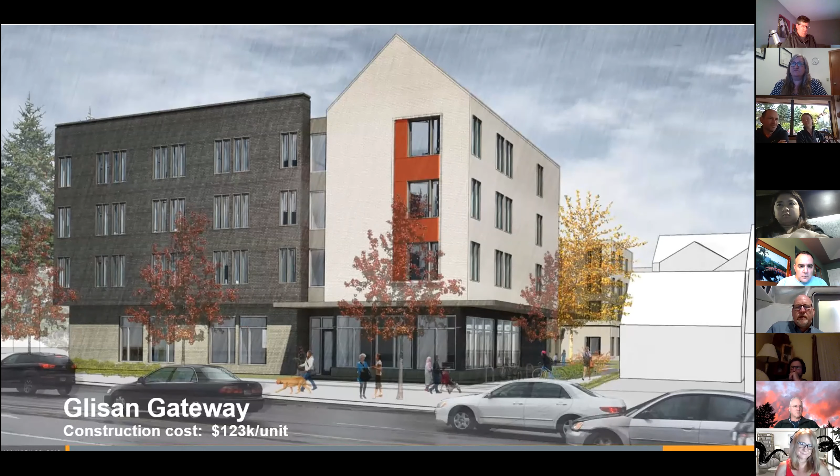This is basically—we believe you can't really know what you don't measure. So as we've focused on cost efficiency and cost effectiveness, we've been looking at how what we're doing and where we're applying these ideas compares to what else is going on.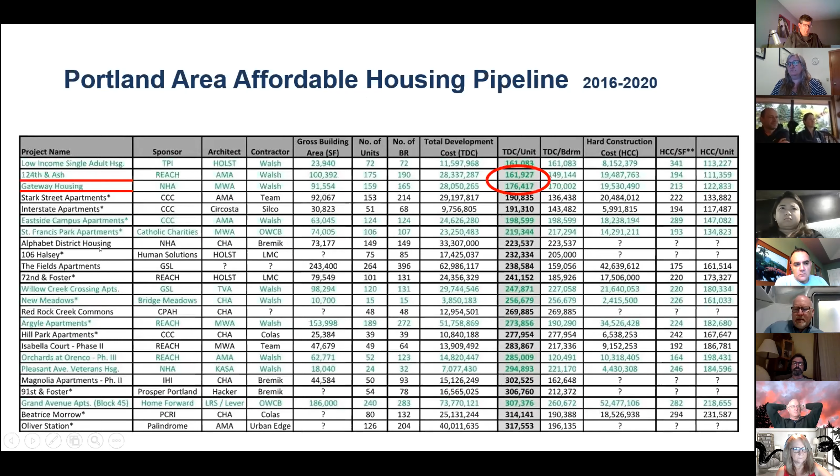So the last thing I want to leave everybody with is this idea: efficiency has another way of paying off. Everything we've talked about to this point has been about first cost. When we design efficiently and build efficiently, we basically create an asset for the owner and those who live in the buildings that will be more cost-effective to maintain and operate over time, because there's literally a reduction in the quantity on a per-unit and per-person basis that these structures have.

So it does a great job reducing costs over time through that efficiency. And then when you get to the point downstream where you have to re-roof, repaint, or re-caulk a building, that reduced quantity also pays off in a lower cost to do those things.

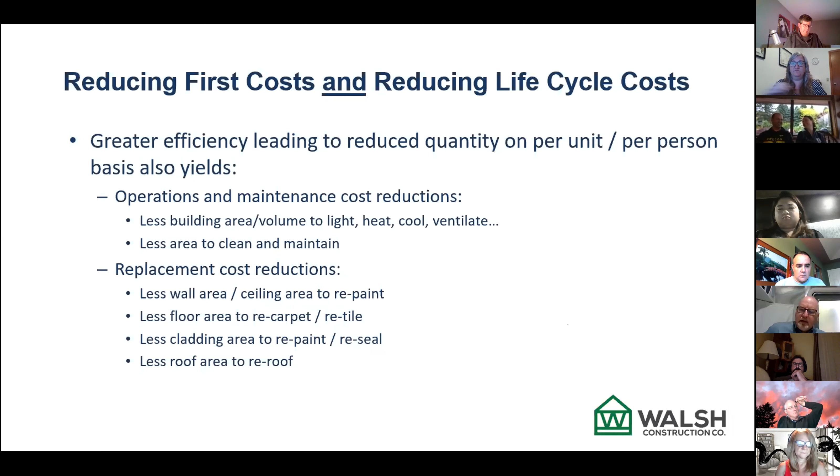So I think with that I will end, because I think we're at the end of our time limit, and maybe I can take questions if I haven't run everybody off yet.

Well, first, I really want to thank you, Mike. That was an amazing presentation. I'm so curious—I live in the Gateway neighborhood, and it's nice to see great projects going up.